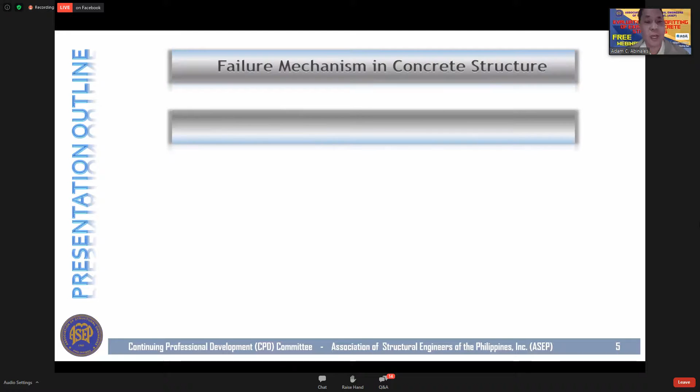Let me present to you the outline of my presentation for this afternoon. I have here to discuss failure mechanism in concrete structures, although some of these were already discussed by Doc Mac Mendoza in the first topic. Then, of course, some damages in concrete structures with infill walls. Then I would be presenting retrofitting as a strategy - what and why. Then what retrofitting techniques we can employ if we are going to do retrofitting of existing structures, and what references, codes, and guidelines we can use as reference in the retrofitting design.

So let me talk about the failure mechanism in concrete structures. First, we have failures at the member level. In the Philippines, most of our concrete structures, or rather most of the buildings here, are made of reinforced concrete, so in essence we can call most of these structures concrete moment frames. So you will have a lot of possible flexural failure in columns. You can see in this photo that the corner column is severely damaged - I would say this is almost not reusable in terms of resisting the force. And then some other aspects of the flexural failure in column.

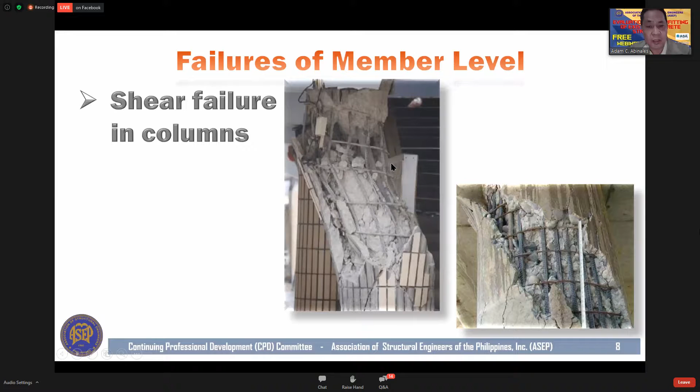Now we have these short column and long column effects. When we say short column, this is a failure of column due to the crushing of concrete. In some cases this scenario would be very prevalent - when you have openings in a facade wherein you have columns and then openings, say for example windows, that portion of the column which is unsupported will be considered a short column. Or when we say long column effect, the failure here is due to the buckling of the concrete. So as evidence here, the short column effect is a very classic case of failure in most reinforced concrete frames.

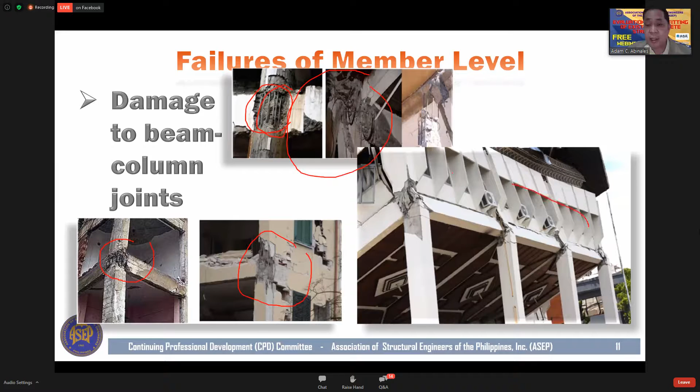Then of course you have this damage to beam column joints. As you can see here, you have exposed reinforcement, but trying to look at this joint here, it seems that the longitudinal reinforcement in that joint has no sufficient or no transverse reinforcement. Looking at this failure here at the joint, as well as this joint here, and of course this cracking of the joint, and this type of failure of the joint.

Most concrete buildings in the Philippines are provided with masonry infill walls. Most Filipinos would like their structures or buildings to be made of reinforced concrete, with solid claddings covering the building. In some cases, we use concrete hollow blocks as masonry infill.

Now, trying to understand the other type of failure, of course, is when you have your structure in total collapse. This type of failure is considered a failure of the structure as a whole. So let's look at this photo here, which I'm sure you're very familiar with.

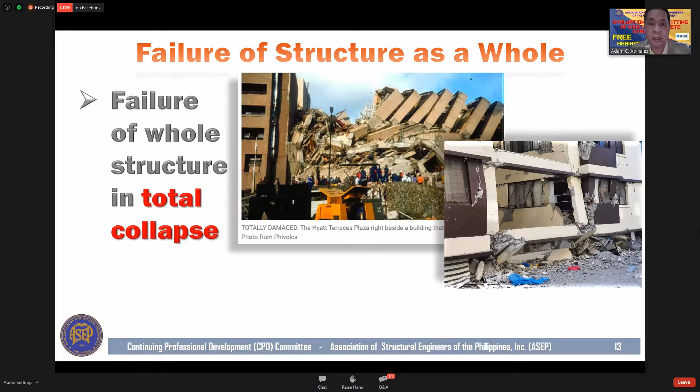This is the Hyatt Terraces Plaza in the aftermath of the July 16, 1990 earthquake that hit Baguio City and other provinces in northern Luzon. This photo here is a residential building that collapsed in the aftermath of the earthquake in Mindanao last October 2019, and this is another building in Cotabato. I think this is about a 6 or 7-story building that is considered to be in its collapse stage.

Other observed failure modes, as I mentioned a while ago, most concrete buildings here in the Philippines are cladded with infill walls. The question here is whether this infill wall would also tend to fail, considering how we model and analyze our moment frame or concrete frames. In most cases, we do not actually model the infill walls.

But depending on how these infill walls are connected to the frames, these infill walls will also fail if they are not actually designed to resist the shear force that will be transferred due to ground shaking. So most infill walls fail due to inadequate shear strength.

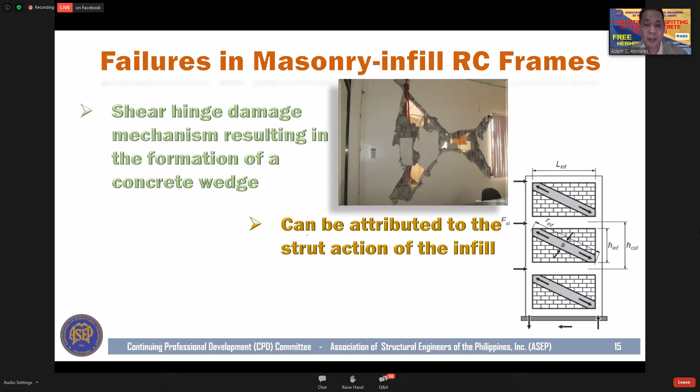So if you look at the failures in masonry infill RC frames, you could have something like a shear hinge damage mechanism resulting in the formation of a concrete wedge, which can be attributed to the strut action of the infill walls.

Looking at this frame, normally if you are really going to model your infill wall as part of your moment frame, it should be modeled as a strut. But if you do not do that, the connection of the walls to the frame will tend to receive forces from the earthquake, and then definitely these walls will fail. This is very common in almost all buildings in the Philippines.

This was before the introduction of modern seismic design provisions in the mid-70s. If we try to recall, the first national structural code published in the Philippines was in 1972.

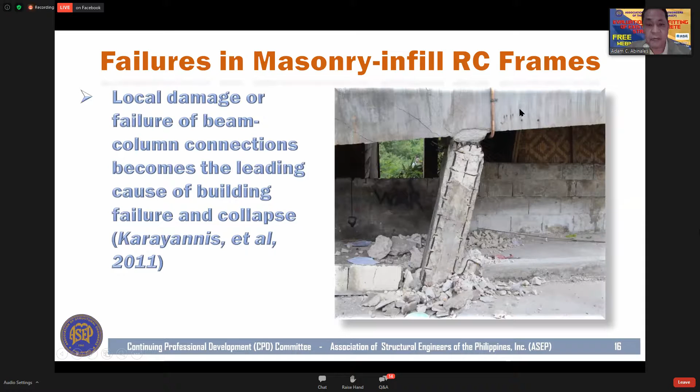Or you could have a local damage or failure of beam connections or beam-column connections, which is the leading cause of building failure and collapse. We have seen a lot of this during the Bohol earthquake, the Negros Oriental earthquake, and even the past earthquake, in simple residential dwellings, one or two story, with what they call a silong or lower ground, where these failures are very prevalent.

Now this is another photo, taken on one of the collapsed, or rather damaged, buildings in the Negros Oriental earthquake, wherein, as you can see, the column is already detached from the superstructure or from the structure itself.

So structures with an open bottom story have significant concentration of drift, and the structural damage becomes considerable. This type of frame, RC frames with infill walls, is regarded as an earthquake risk, not only in the Philippines but also in other countries like New Zealand.

Let me talk about a case of failure of masonry infill RC frame. Looking at this photo here on the right, you have a residential building structure which failed at the ground floor masonry infill and columns. Even if the building is composed of these infill walls and columns, the structure nevertheless still failed.

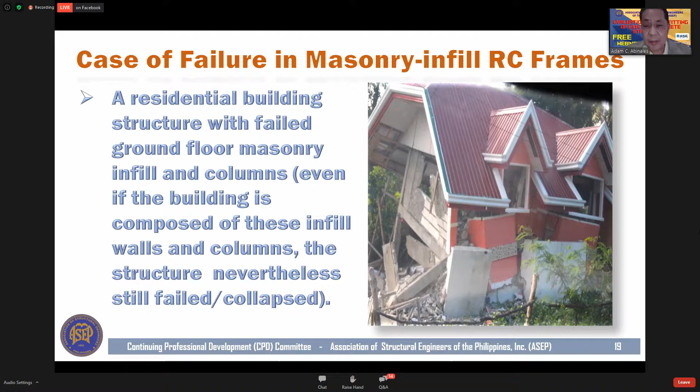So maybe for reasons that the materials used are substandard, or this building was constructed without the benefit of a professional design, or basically it was just built without the proper documents that it should be standing as such, or maybe you have a case of a masonry infill apparently that got disconnected from the concrete frame.

Well, I think this is one thing that most engineers or most constructors should look into, because the infill walls are not properly connected, but providing a space not to make the walls too rigid or too stiff, so that it will not affect the behavior of the concrete frame. Inadequate connection between the infill and the concrete frame. Or there is a case of what we call a weak beam column joint, which is very apparent.

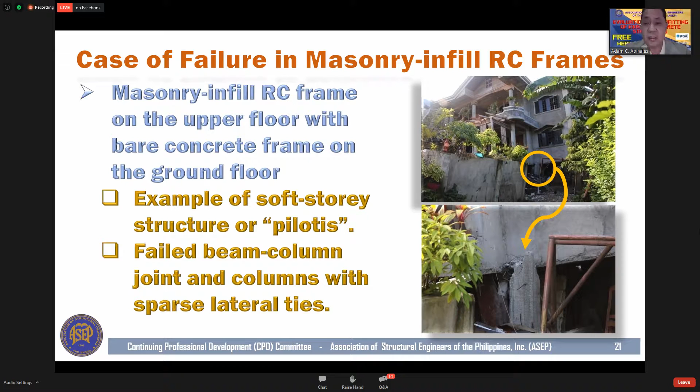Or you can have a case of a masonry infill RC frame, very massive on the upper floor with bare concrete frame on the ground floor. So this is something like a case of a soft story. Or you can have a case of a damaged two-story. This one is actually a barangay hall in the Negros Oriental earthquake with masonry infill concrete frame.

So looking at this, the connection of this floor here to this column here at that particular joint, there is inadequate connection between the masonry and the beams. Actually, there are supposed to be some walls here, but I think they have been torn down. And the beams and columns and the joints of this column to that frame there have sparsely spaced lateral ties, as you can see here at the beam column joints.

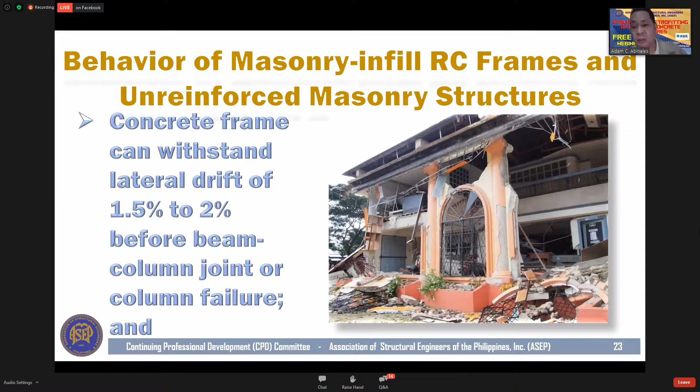If we try to understand the behavior of masonry infill RC frames and that of the unreinforced masonry, as a rule of thumb, the concrete frame should be able to withstand a lateral drift of about 1.5 to 2% before beam column joint or column failure, while the maximum stress of the unreinforced masonry is reached at a drift angle of approximately 0.3% only. So the unreinforced masonry may be expected to fail before the concrete frame does.

Reality check: similar methods of building construction made of RC frames with concrete hollow blocks as masonry infill are very common in the Philippines. We may ask, can these damaged structures be restored? The quick answer could be yes. Now we talk about retrofitting as a strategy. If our answer in the previous slide is yes, then we can still restore the building.

Of course, retrofitting or restoration of a damaged building would be subjected to a very thorough, detailed evaluation before you decide that retrofitting would be your strategy. I have seen a lot of questions in the previous presentation asking about retrofitting, so I hope I will be able to answer some of these questions. Now, why do we need to retrofit? And what is retrofitting all about?

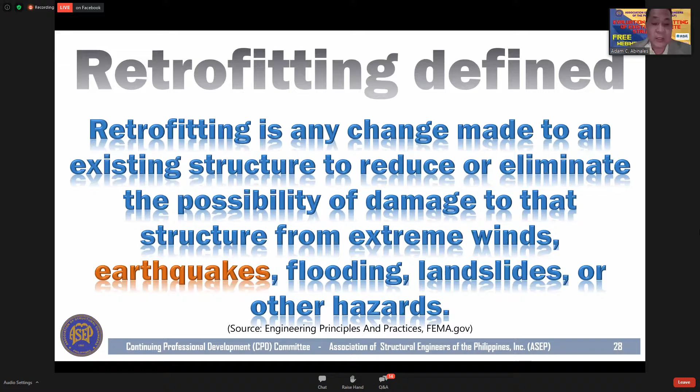What are the advantages of retrofitting? All structural problems have more than one technical solution. So in retrofitting, the engineer would have a lot of choices. But of course, the strategy would depend on how we go about the design and satisfy other retrofitting requirements. And final selection will ultimately rest upon an economic evaluation of the alternatives.

If you're doing a detailed evaluation of an existing structure and eventually a retrofitting, this is one important aspect you have to consider, the economic evaluation of the alternatives. There seems to be an industry practice or standard that if the cost of retrofitting would be about 60% of the cost of new construction, then you may decide not to push retrofitting anymore, but rather demolish the entire building and put up a new one. But of course, it will all depend on how you really evaluate your design.

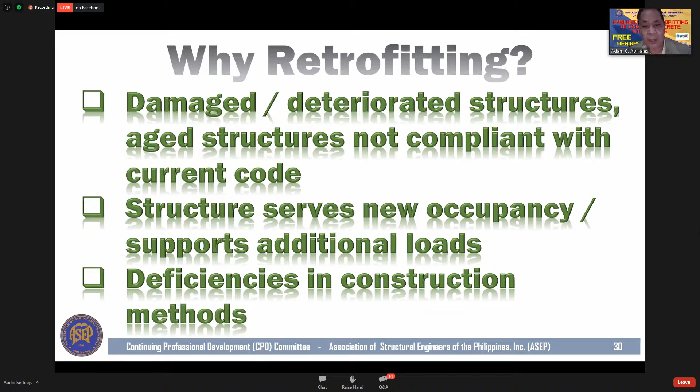Or your structure has some known deficiencies during the construction. I would like to note that this really happens, because we have some projects wherein we see newly constructed buildings which have deficiencies while these buildings are being constructed. So obviously, you will have to do some retrofitting.

Or you will have some design deficiency. This may happen when the building is already constructed, and then during the early serviceability of that building, there are some manifestations of cracks or distress. Then there would be a cloud of doubt of having a design deficiency for that particular building. So in that case, you will have to do a detailed evaluation.

In your evaluation, you might find out that compared to the actual strength, you have a deficiency, or in the actual serviceability, you have an issue, or you have not met the performance level objective. As we all know, in the NSCP 2015 or the previous NSCP code editions, life safety is the minimum code requirement set as the performance level objective. Let me just present to you this video.

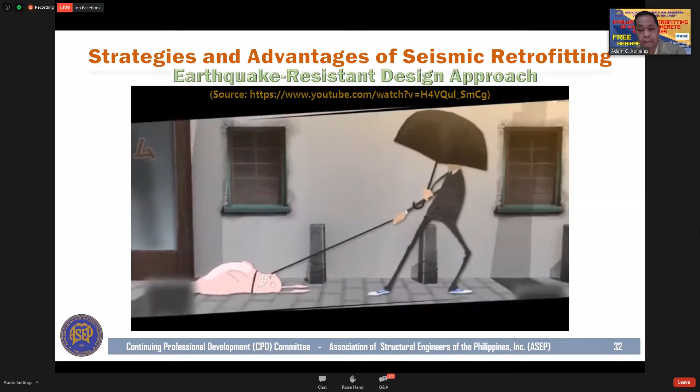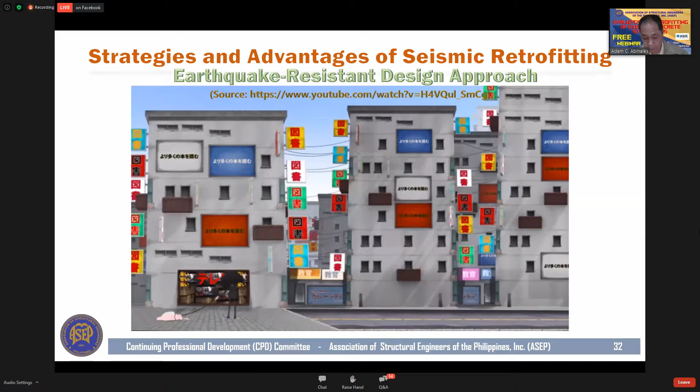Earthquakes have always been a terrifying phenomenon, and they've become more deadly as our cities have grown, with collapsing buildings posing one of the largest risks. Why do buildings collapse in an earthquake, and how can it be prevented? If you've watched a lot of disaster films, you might have the idea that building collapse is caused directly by the ground beneath them shaking violently, or even splitting apart. But that's not really how it works. For one thing, most buildings are not located right on a fault line, and the shifting tectonic plates go much deeper than building foundations. So what's actually going on?

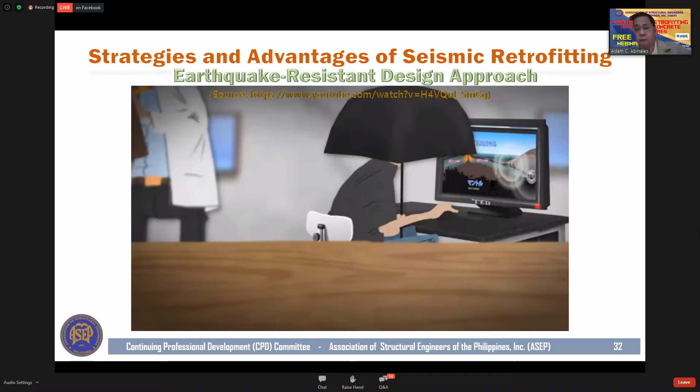In fact, the reality of earthquakes and their effect on buildings is a bit more complicated. To make sense of it, architects and engineers use models, like a two-dimensional array of lines representing columns and beams, or a single line lollipop with circles representing the building's mass. Even when simplified to this degree, these models can be quite useful, as predicting a building's response to an earthquake is primarily a matter of physics. Most collapses that occur during earthquakes aren't actually caused by the earthquake itself.

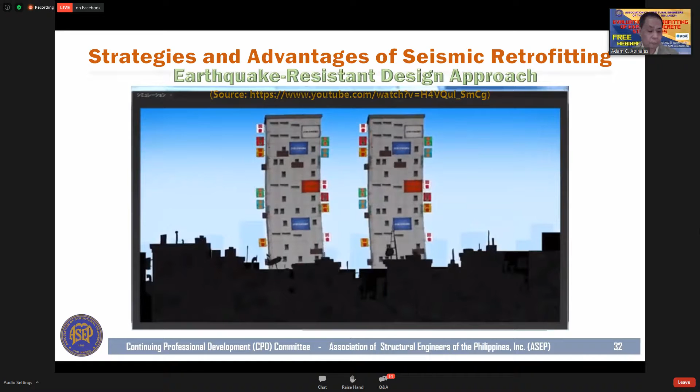Instead, when the ground moves beneath a building, it displaces the foundation and lower levels, sending shock waves through the rest of the structure and causing it to vibrate back and forth. The strength of this oscillation depends on two main factors: the building's mass, which is concentrated at the bottom, and its stiffness, which is the force required to cause a certain amount of displacement. Along with the building's material type and the shape of its columns, stiffness is largely a matter of height. Shorter buildings tend to be stiffer and shift less, while taller buildings are more flexible.

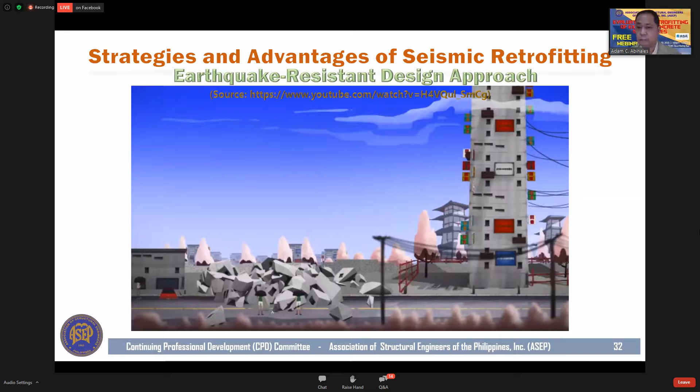You might think that the solution is to build shorter buildings so that they shift as little as possible. But the 1985 Mexico City earthquake is a good example of why that's not the case. During the quake, many buildings between 6 and 15 stories tall collapsed. What's strange is that while shorter buildings nearby did keep standing, buildings taller than 15 stories were also less damaged. And the mid-sized buildings that collapsed were observed shaking far more violently than the earthquake itself. How is that possible? The answer has to do with something known as natural frequency.

In an oscillating system, a frequency is how many back and forth movement cycles occur within a second. This is the inverse of the period, which is how many seconds it takes to complete one cycle. And a building's natural frequency, determined by its mass and stiffness, is the frequency that its vibrations will tend to cluster around. Increasing a building's mass slows down the rate at which it naturally vibrates, while increasing stiffness makes it vibrate faster. So in the equation representing their relationship, stiffness and natural frequency are proportional to one another, while mass and natural frequency are inversely proportional.

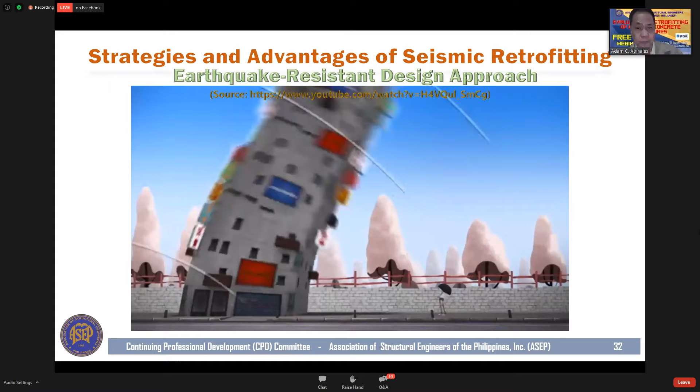What happened in Mexico City was an effect called resonance, where the frequency of the earthquake's seismic waves happened to match the natural frequency of the mid-sized buildings. Like a well-timed push on a swing set, each additional seismic wave amplified the building's vibration in its current direction, causing it to swing even further back, and so on, eventually reaching a far greater extent than the initial displacement.

Today, engineers work with geologists and seismologists to predict the frequency of earthquake motions at building sites in order to prevent resonance-induced collapses, taking into account factors such as soil type and fault type, as well as data from previous quakes. Low frequencies of motion will cause more damage to taller and more flexible buildings, while high frequencies of motion pose more threat to structures that are shorter and stiffer.

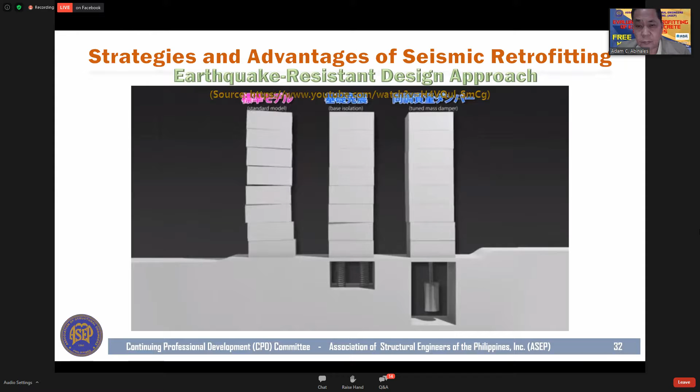Engineers have also devised ways to absorb shocks and limit deformation using innovative systems. Base isolation uses flexible layers to isolate the foundation's displacement from the rest of the building, while tuned mass damper systems cancel out resonance by oscillating out of phase with the natural frequency to reduce vibrations. In the end, it's not the sturdiest buildings that will remain standing, but the smartest ones.

Okay, so basically, when we talk about retrofitting, and by the way, I would like to acknowledge Dr. Andy Oreta for that video, because I took that video from one of his presentations.

Okay, so basically, when we talk about retrofitting, we are focusing more on the structure to be earthquake resistant. So if you have a building, and then we subject it to the usual gravity loads, and then we analyze it for lateral forces like wind, and of course the excitation of the ground. Now the building itself would be able to dissipate that ground motion; that seismic energy from the earthquake would be dissipated by the structure itself.

As we all know, the building itself has its damping characteristic, and there's a certain percentage of that building to be able to dissipate the energy from the ground motion or ground shaking. So that's why when we design the building or the structural members of the building, we have to satisfy strength and of course ductility. Definitely, when we talk about ductility, we see to it that we satisfy the requirement of the code as far as seismic detailing is concerned.

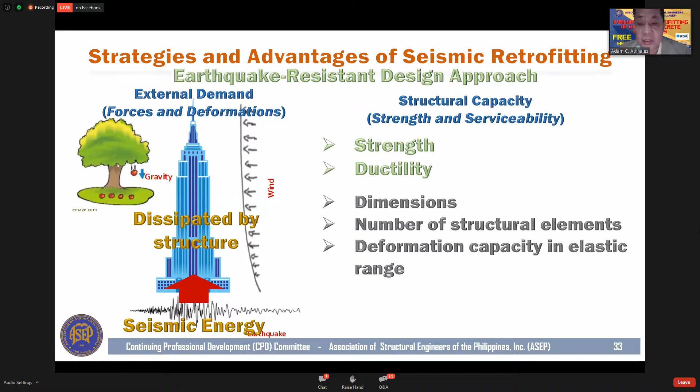And then in our design of the structure, we deal with these other properties of the structure. We look at the dimensions of the floor to floor, the dimensions of the base, and the number of structural elements to be used, the columns, the shear walls, and so on. And then we must design it so that we satisfy the requirement for the deformation within the elastic range. And then, of course, as we push the structure further, we must satisfy the deformation capacity in the plastic range. That is where the ductility will come in.

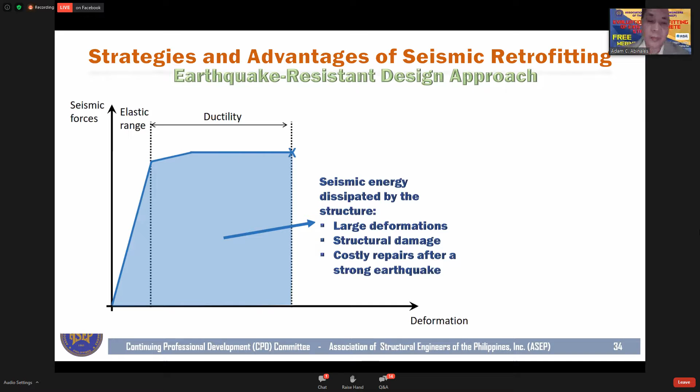When we talk about earthquake resistant design, we expect that the building or structure would still be able to sustain some damage, but not to the point that the damage would be irreparable. Because otherwise, if that building were subjected to a strong earthquake, you might end up doing a costly repair.

So this graph here tries to define the performance level objective. For our structure to be able to sustain large deformation and satisfy the life safety requirement, we can go beyond this point. But definitely it really depends on the earthquake motion that would be subjected to your structure.

Now, when we do retrofitting, what are the strategies, or actually the advantages? Basically, it completes the load path. In some cases, when you find issues about the load path or load pattern of the lateral force resisting elements, you will be able to eliminate or reduce the potential structural irregularity.

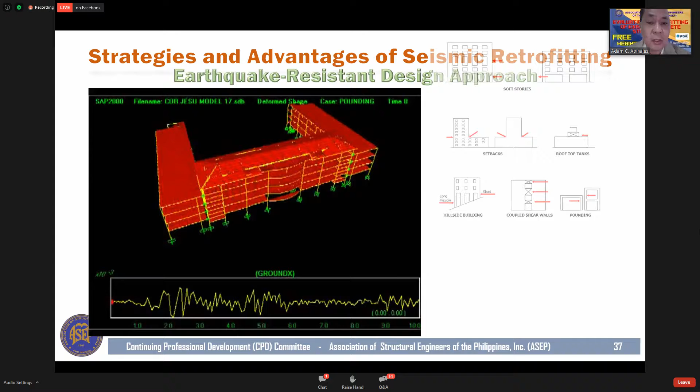Now let me show you this video. This is a case showing one of the irregularities that needs to be looked into. You have a case of pounding because of a U-shaped building, which is very common in public school buildings here in the Philippines using a U-plan. If you have this case, it's better to have a seismic gap at this joint.

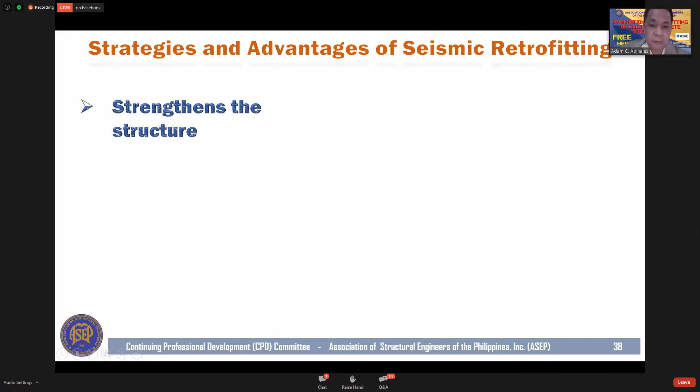Basically, retrofitting will strengthen the structure. There's no doubt about it; that is the main objective of retrofitting, whether you do localized member retrofit or global retrofitting. In that case, you reduce the earthquake demand and try to compare the demand versus the capacity of the structural elements.

Or if you have some structure with a damping device or system, then you would be able to reduce the seismic demand.

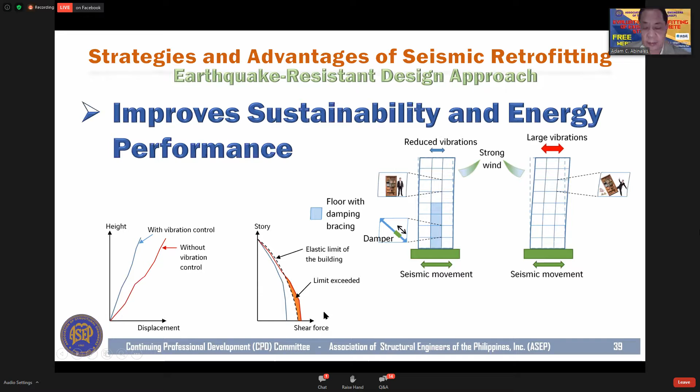Retrofitting an existing building can oftentimes be more cost-effective than building a new facility, since buildings consume a significant amount of energy. If you try to look at sustainability in building construction, 40% of the nation's total energy consumption is utilized for building construction and occupancy, and especially for heating and cooling, that's almost 32%.

Nowadays we have been talking about green buildings, and as a structural engineer we also have our role in how we make our building compliant as a green building certified. Because existing buildings comprise the largest segment of the built environment, it is important to initiate energy conservation retrofits to reduce energy consumption and the cost of heating, cooling, and lighting buildings.

But conserving energy is not the only reason for retrofitting existing buildings. You have to consider the main aspect: why do we do retrofitting? And that depends on the outcome of your detailed evaluation.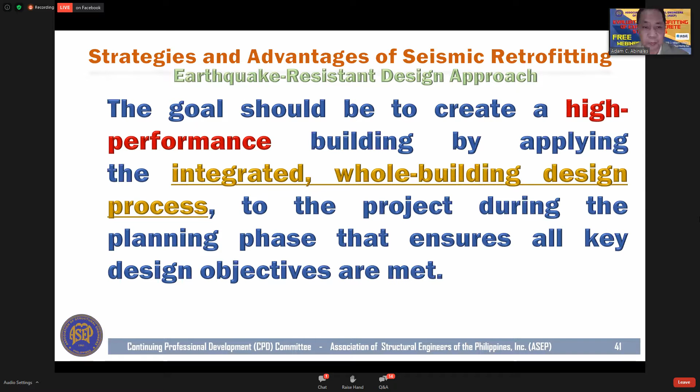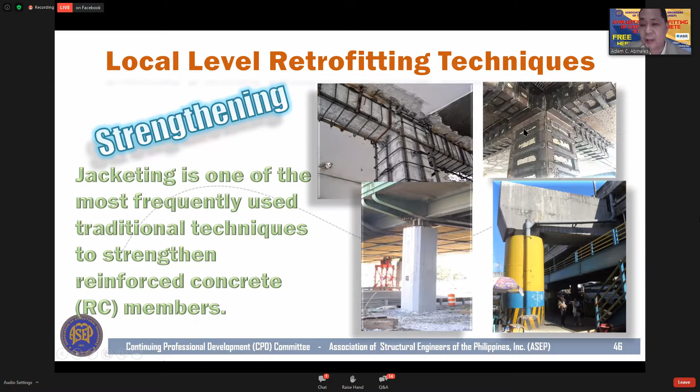So let me focus on each of these techniques. Strengthening via jacketing is one of the most frequently used traditional techniques to strengthen RC members. You have a case in this photo here, strengthening this frame, or that frame, or this column here.

Strengthening of an RC column is needed when the load carried by the column is increased, maybe due to an increase in the number of floors or design deficiency. The compressive strength of the concrete or the percent and types of reinforcement are not according to the code.

You might ask, does this really happen? Yes, because in my personal professional practice, we do some review of designs from other engineers of record, and sadly, we find cases wherein the designer has this kind of issue.

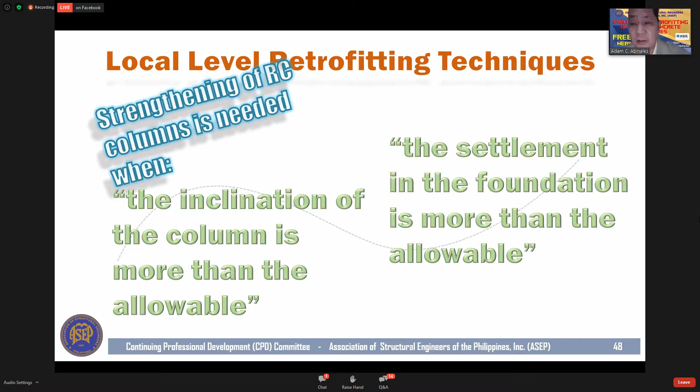Or the inclination of the column is more than the allowable. As we all know, the column should be laid vertical, it should be vertically aligned. But if there is some displacement or deformation of the structure, then there is a tendency for the column to be out of plumb. Like in the case of the Tower of Pisa, although that is very classic, even if it is inclined, it remained as it is. Or there is a settlement in the foundation which is more than the allowable.

What are the major techniques of strengthening? We have the traditional techniques: concrete jacketing and steel jacketing, or simply using externally bonded steel plates. The alternative would be post-tensioning, or fiber-reinforced polymer wrapping, which we call FRP wrap.

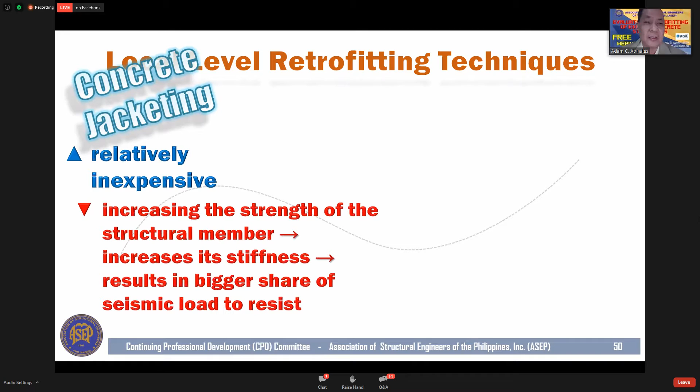Concrete jacketing. I would say concrete jacketing is relatively inexpensive. But when increasing the strength of the structural member using jacketing, you increase the stiffness, but you also increase the seismic weight. That is the downside. Even if the original column is 30 by 30 and you make it 60 by 60 just to satisfy the demand, you're definitely adding seismic weight. So that is the drawback.

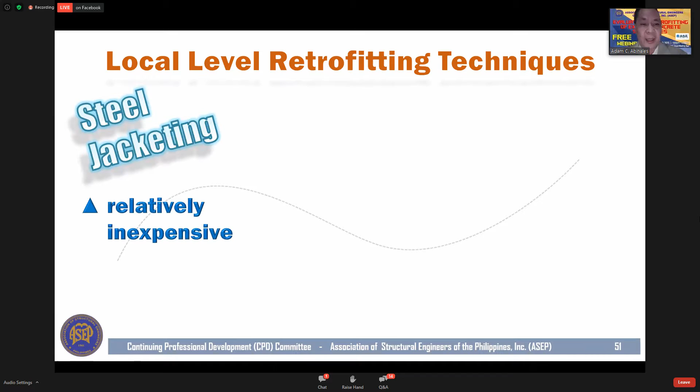For steel jacketing, same as in the case of concrete, it is inexpensive. However, there would be a substantial increase in the weight because of the weight of the steel added to the element.

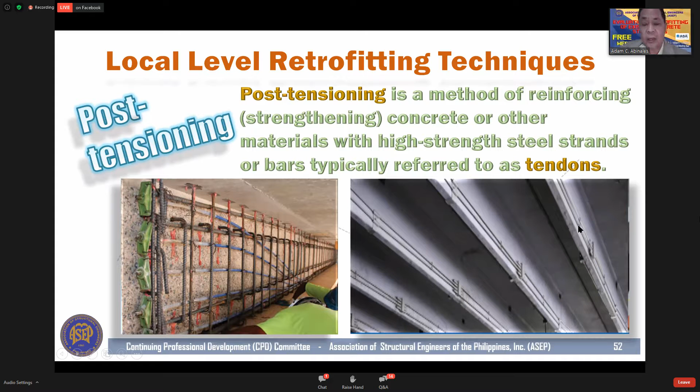The alternative is to do post-tensioning. Post-tensioning is a method of reinforcing or strengthening concrete or other materials with high-strength steel strands or bars, typically known as tendons. As you can see in this photo, these are the tendons placed outside the face of the girder, similar to this photo on the right in the building, where you have a series of beams which are all retrofitted or strengthened using post-tension wires or tendons.

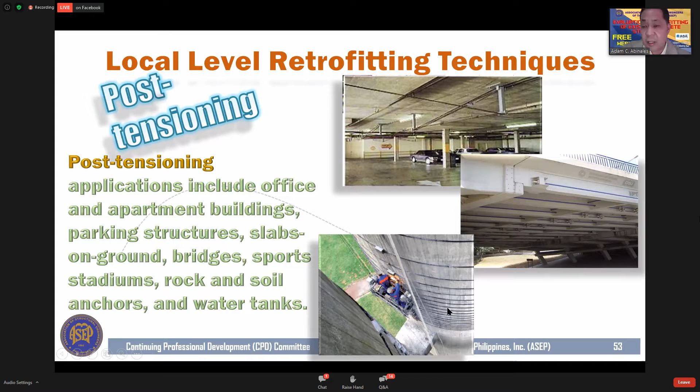In many cases, post-tensioning allows construction that would otherwise be impossible due to site constraints or architectural requirements. But of course, if the ceiling is exposed, then you can see the structural elements, and definitely you can do the post-tensioning there. But if you have a closed ceiling building, that would be a big issue architecturally. Still, you can do the post-tensioning strengthening, but you will be doing a lot of retrofitting work. Now, what you see here is post-tensioning applied to water tanks.

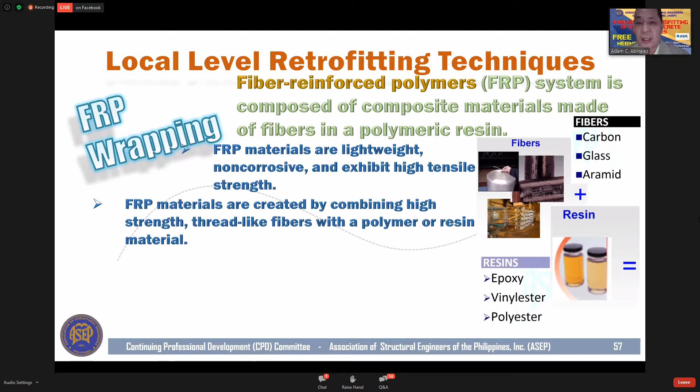Now, FRP wrapping. FRP, as we all know, is a system composed of composite materials made of fibers and polymeric resin. For fibers, you can have carbon, glass, or aramid. For the resin, the polymeric resin can be epoxy, vinyl ester, or polyester. With this composite material, you create the FRP by combining high-strength thread-like fibers with the polymer or resin material, resulting in a rigid material that is high-strength yet lightweight. The fibers give the material its strength and stiffness characteristics, while the polymer holds the fibers in alignment.

Now, what you can see here are illustrations of some structures that were fiber wrapped. Say, for example, you have these piers of a bridge, wherein you have a series of columns, and then they apply this retrofitting, or rather this strengthening, using FRP, and now this is the finished job.

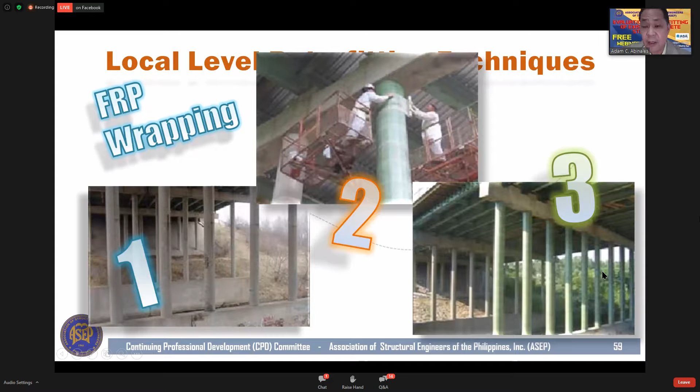Another case wherein you have these slender columns, so trying to increase its flexural and shear capacities, then you have this wrapping, and now this is the completed retrofitting work. Also here, applying the FRP, and now you have the finished retrofitting work using FRP.

In buildings, say you have a slab, and then you try to do some retrofitting of this particular section of the slab, or maybe in the case wherein there is an increased live load in this area, you can apply retrofitting here. Or maybe this could be along the line of the beam. It really depends. Actually, we have a case wherein we have a multi-purpose court, wherein we have to do retrofitting of the slab because underneath the multi-purpose court there is a cistern.

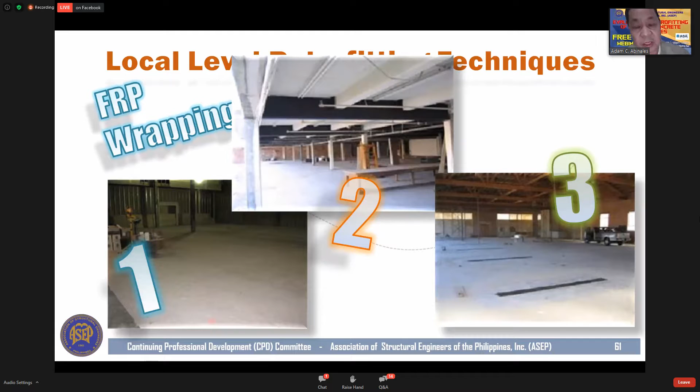Or in pipes, you can also do this retrofitting inside the pipes.

So that is all about those traditional and alternative techniques applied to strengthening of the beams, strengthening of the columns, strengthening of the joints, and then you apply these techniques. Now, what about strengthening the footings?

Well, basically, you can do it either with concrete or steel jacketing. You can still do it using FRP wrapping, or there are cases wherein you have to intervene, especially under the foundation, and that is doing the underpinning. Or you can do the combination of both jacketing or wrapping and underpinning.

Now let me show you some of the photos for strengthening of the footings. So this is a procedure wherein you can do the strengthening of the footings. On slide one, you have this exposed column, and then of course the footing. Just imagine that portion here, which is only the footing of that column, and then you lay down your reinforcement, put all the rebars, the cage, and then pour the concrete.

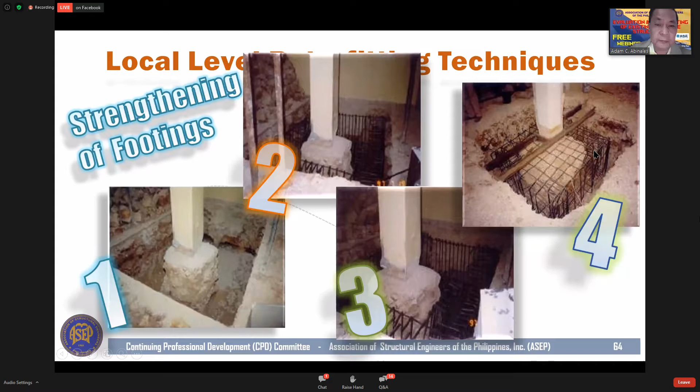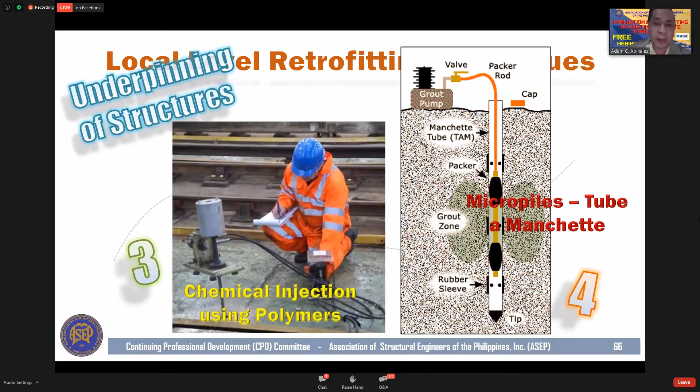Or you do chemical injection using polymers. Or in number 4, you can do micropiling or micropiles, the use of micropiles. And then in number 5, you do some soil or in-situ stabilization. This is what we know as ground improvement, wherein you want to increase the bearing capacity of the underlying soil.

So sometimes you can do it. Of course, if you have an existing building, then you can only do it either by jet grouting or soil cement column.

Now, what about strengthening of masonry infill or shear walls? Basically, you just do some use of spray-on materials such as engineered cementitious composites. So the process would be something like this: you have to expose the reinforcement because if you have a crack, you try to get the influence area of this crack or damaged portion of the wall, then you expose and clean everything.

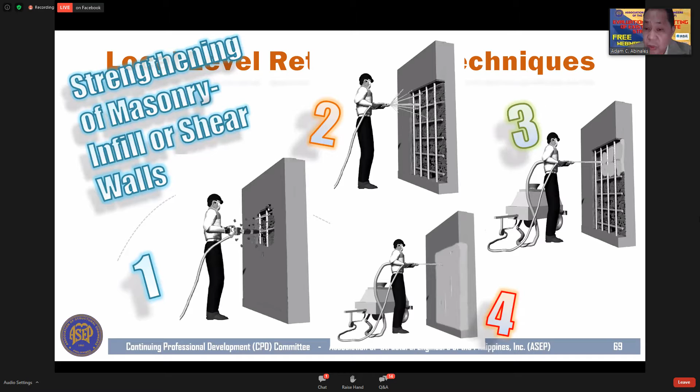Then you do the application of the cementitious material, either by pressurized spray, a pressure jet of concreting, or spray concrete, to restore the damaged portion of the wall.

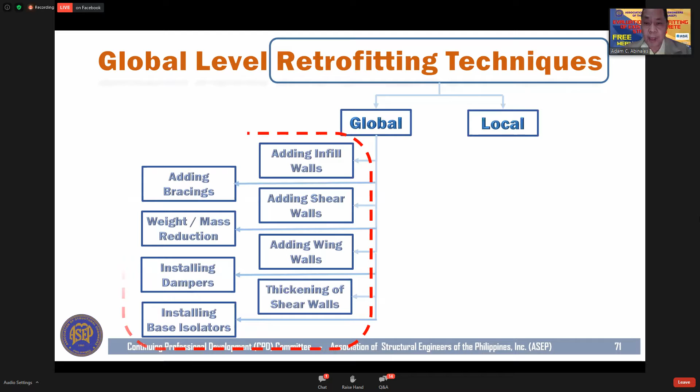Now, let's go to the global retrofitting schemes. This global retrofitting tends to alter the behavior of the entire structure, so whatever technique is used, that would be the effect. This happens because there is a change in the load path. As I mentioned earlier, system strengthening will definitely change the load path, and it will reduce the seismic effects on the structure.

The objectives of global level retrofitting is to increase seismic resistance, resulting in reducing seismic demand. Now let me go through each of these global level retrofit techniques one by one.

Adding infill walls: the share of the seismic load is taken by the infill from the concrete frame. If the infill wall is so connected to the frame that it will affect the behavior of the frame, then make sure you have a very strong, good connection, because the infill must be strong enough to absorb the seismic load.

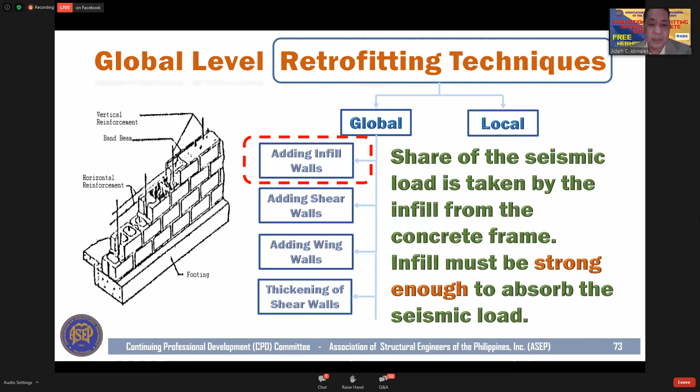This is actually a three-story building which I photographed in Taiwan when we visited after the Tainan earthquake. This base of the building was converted into a shear wall, and this building performed well during the Tainan earthquake, because at that time the building was already there. I would say this building was damaged in a previous earthquake before.

Adding wing walls: this is very common in institutional structures like churches, where you have these wing walls added to the frame. These wing walls will take the share of the seismic load in the direction where they are added.

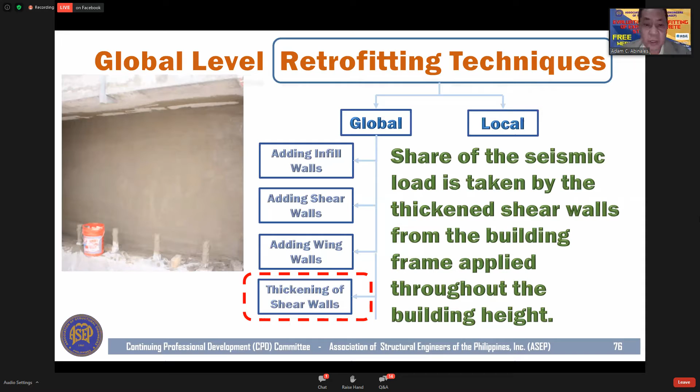Now let me go to adding bracings. The share of the seismic load is taken by the bracings. What is the effect? It will reduce the drift demand, and can be placed either interior or exterior of the system. These bracings could be post-tensioned, especially if you are using tubular sections for the bracing, with post-tensioning introduced inside those tubular sections.

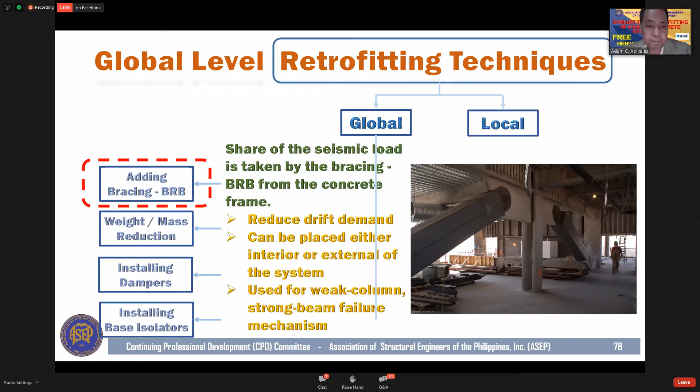Weight or mass reduction: basically this applies to a case where you have a very top-heavy or heavy upper floor, to reduce seismic demand. Sometimes buildings have a storage area in the upper floors that you have to move to the lower floor or to the ground floor, assuming there is no basement.

Now let me proceed to the introduction of passive systems or isolation, something like controlling the vibration of the building, or decoupling the superstructure from the substructure. So either you use dampers or you use base isolators. Typically when we talk about dampers, it is more accurately vibration control devices. Let me give you the difference: when do you use vibration control devices, and when do you use base isolators?

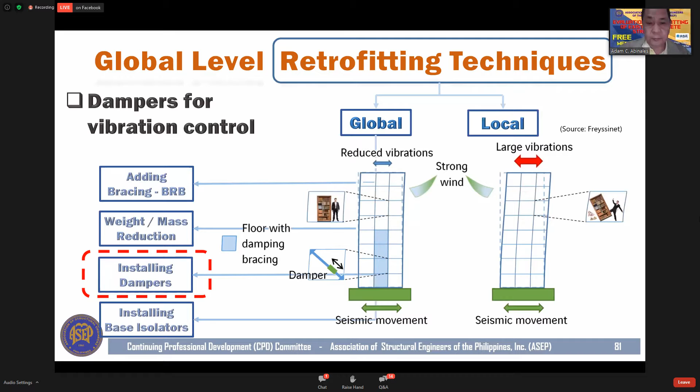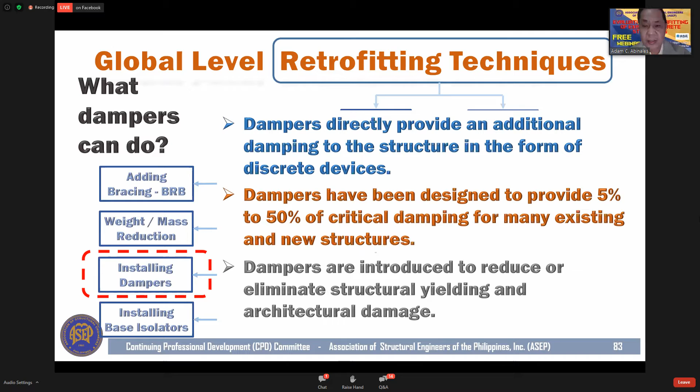What can dampers do? Dampers directly provide additional damping to the structure in the form of discrete devices. Dampers have been designed to provide 5% to 50% of critical damping for many structures or even new structures. Dampers are introduced to reduce or eliminate structural yielding and architectural damage.

What are the advantages of dampers then? Again, let me go back to the figure presented a while ago. So you have this building, and then you have these loadings, the wind and the ground shaking, and then you have the seismic energy which is being transferred to the structure. Because of the inherent damping characteristic of the building, based on the proportion of the elements, the energy would be dissipated by the structure to a certain amount.

But if you introduce dampers, then the other seismic energy would be further dissipated by the dampers. So dampers reduce energy transmitted to the structural members, and reduce the amplitude and period of the vibration. Then in effect, the forces and demand would be reduced.

So what happens if the building has dampers? Going back to the graph before, you have the force and displacement curve, wherein you design your building within the code, within the elastic range, and you know for a fact that you still have the ductility of the elements. It can further absorb the deformation.

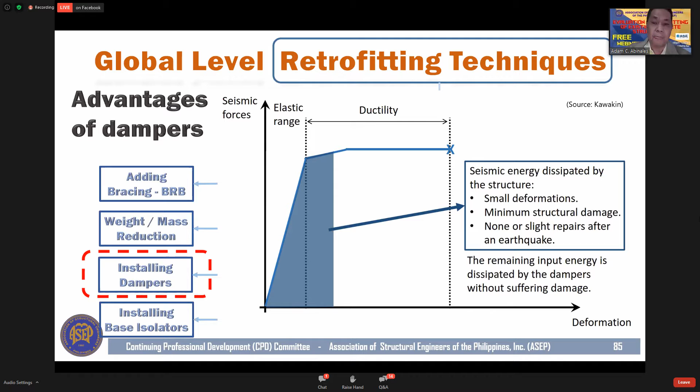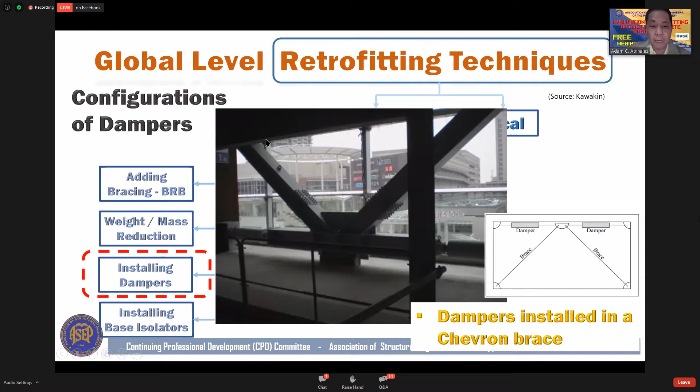So let me show you some configurations of dampers. This is dampers installed as diagonal braces, or dampers installed as a chevron brace, something like this, wherein these are the dampers, or dampers installed in a toggle brace.

It could be an outer frame, meaning you can put the dampers on the external facade of the building, although it would have an architectural aesthetic effect, because practically you're covering the structure with these devices. Or it could be dampers in a toggle brace inside the building, or a built-in frame.

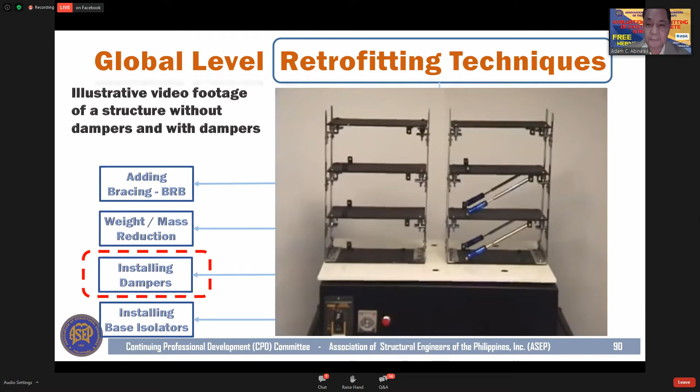Now, let me talk about isolators. I'm almost on the last part of my presentation. The principle of base isolation is that the structure is designed to remain elastic under reduced actions. The deformations are concentrated only in the seismic devices, referring to the base isolators. What are the advantages? Base isolators, again, reduce seismic demand. Base isolators raise both a structure's seismic performance and its seismic sustainability considerably.

Base isolators lower inertial forces in the structure. They limit interstory drift, thus causing almost no damage to non-structural elements. Base isolators reduce perception of shaking.

You know, if you are inside a building which has base isolators... actually I have heard a personal experience of a friend who is staying in a building which is base isolated. Everyone felt the earthquake, but those people in that building with base isolators didn't feel the ground shaking, because that is the perception. Base isolators promote immediate occupancy of the structure after the event.

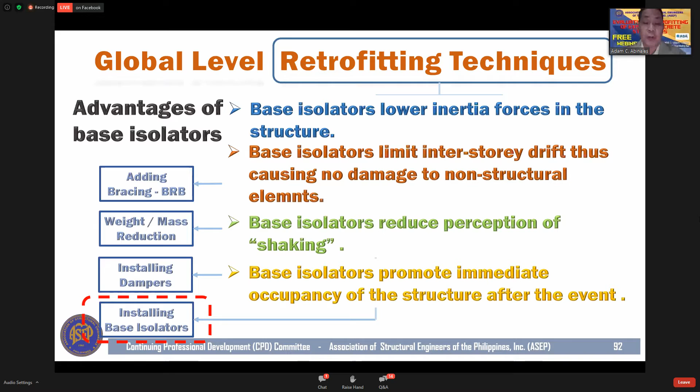If there are advantages, then there are disadvantages. Base isolators can be an expensive solution. Contrary to popular belief, base isolation does not make a building earthquake-proof. Well, this is a debatable, I would say, statement or phrase about earthquake-proof structure. Whenever I have been talking about seismic retrofitting, I only use the term earthquake resistant, and I do not use the term earthquake proof.

So base isolators, if you use them as retrofitting, you might think, how can you retrofit a building using base isolators if it's already existing? Because in almost all cases, you use base isolators when you are starting a new building. But basically we can do base isolation for an existing building. Say for example, you have a column to be cut. Definitely you have to cut the column. And then you place the support and the beams before you cut the column.

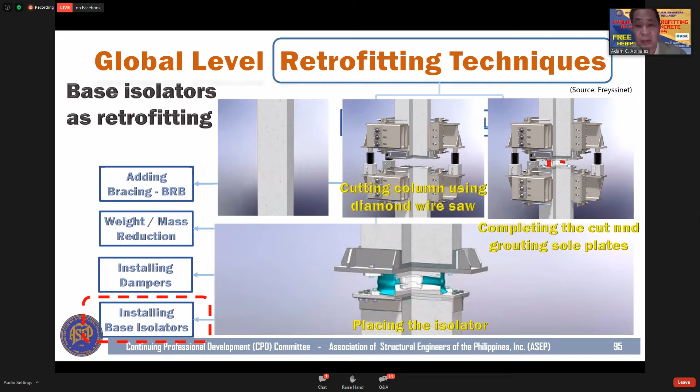So what happens then? You cut the column using a diamond wire saw. Then you complete the cutting and grout the sole plates as part of the mechanism of the jacks, and then you place the isolator. I think there is one paper during the AIC last year where a hospital in Turkey was retrofitted using base isolators.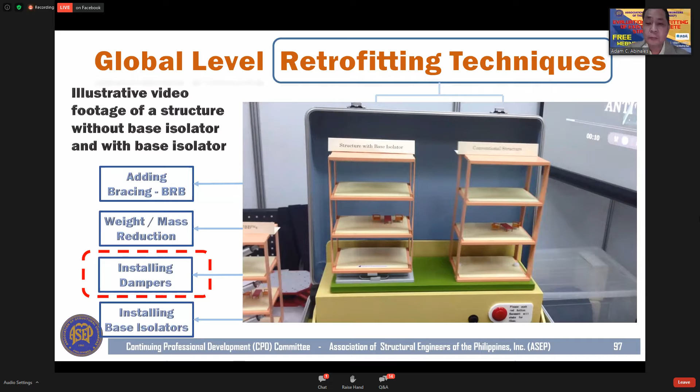Okay. So base isolators plus dampers, when you combine them as retrofitting, it is also possible, with viscous dampers acting in parallel with the isolators to increase the energy dissipation. When I visited Japan last year, sometime in October, I visited another company there, and their building is base isolated. I went to the basement of that building and I saw the combination of these base isolators with dampers. So you could just imagine. Maybe they are showcasing that building with these base isolators and dampers.

Okay, so let me now refer you to the codes and standards. One of the questions raised before is that there's no code or standard about retrofitting in the NSCP. Yes, you are right, there's no such thing. But let me just walk you through. In designing and choosing retrofitting techniques, before you go into the design, first you have an efficient and integrated load path. Make sure that you will be able to really analyze your structure and identify this.

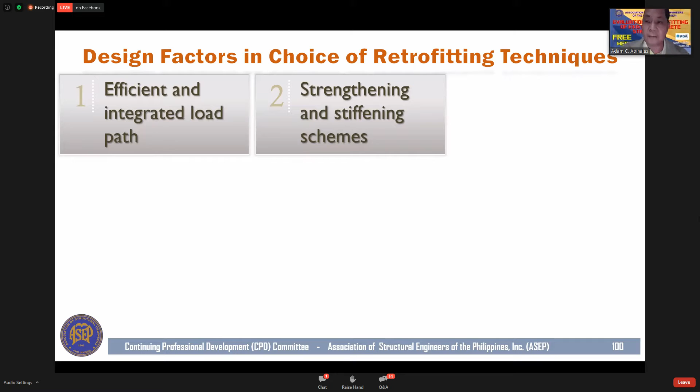Then you think about the strengthening and stiffening schemes. You don't think of one technique or two techniques. You have to think of all possible strengthening techniques. In fact, when we did a project for one government agency, we had to prepare 3 schemes, and that is the minimum requirement of that agency. Then when you do the analysis, you identify all the possible failure modes. All of these things you will be able to find out in your evaluation as presented by Doc Mac.

Then you look at increasing the deformation capacity of the members, because that is your goal in retrofitting, and reducing the force demands in the members. So basically, these are the factors that you have to think of. And then, obviously, you must also consider the aesthetics.

Appearance of the structure. But if there are cases wherein you cannot really avoid putting all these retrofitting devices, then so be it, the aesthetic would be compromised. Make sure that it can be easily constructed, or it is workable, or maybe is the technology available, locally available.

But of course, in the Philippines, although we don't have some big factories or shops here wherein other tech devices are available, we have neighboring countries in the ASEAN region where we can source this technology. Of course, you have to consider the cost, and you decide on the final retrofitting scheme.

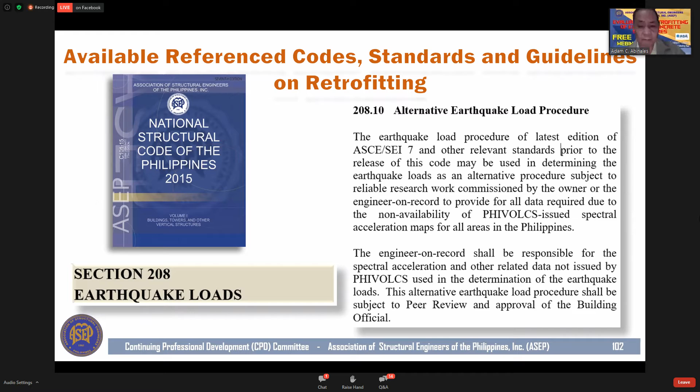Also, in Section 208, there are alternative procedures discussed: alternative lateral force procedures using rational analysis based on well-established principles of mechanics may be used in lieu of those prescribed in these provisions. And in the same section, you have 208.4.8.4.2 on seismic isolation. Seismic isolation, energy dissipation, and damping systems may be used in the design and analysis of structures when approved by the building official and when special detailing is used to provide results equivalent to those obtained by the use of conventional structural systems.

So I would say that these provisions of the NSCP would give a hand to the structural engineer. But I would say that the structural engineer must be knowledgeable enough on these aspects of alternative procedure. You really have to fully understand the principle behind this. Okay.

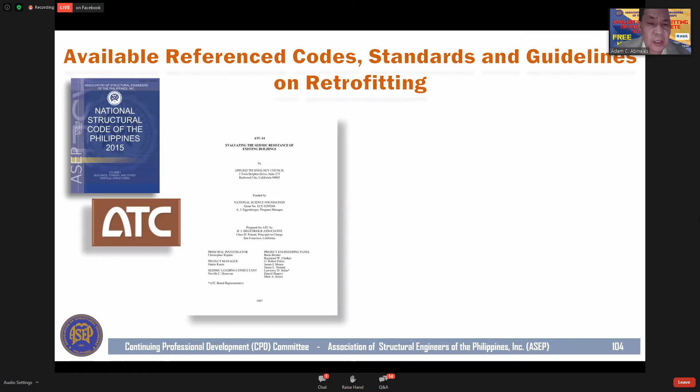We have this ATC-14, which is basically a publication that created a concept of screening buildings for potential hazard. Of course, this is covered by the evaluation as presented by Doc Mac Mendoza. But when you talk about retrofitting or rehabilitation, there is this supplemental.

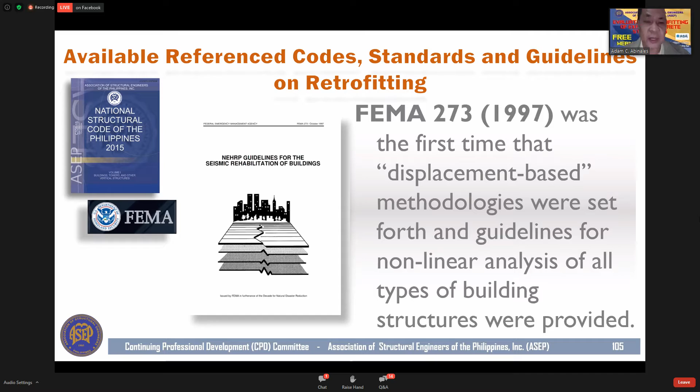Any problem? Am I clear? Okay.

So FEMA 273, wherein you have the NEHRP guidelines for the seismic rehabilitation of buildings. Then later on, we have ASCE 31-03 on seismic evaluation of existing buildings. That is supplemented with ASCE 41-06 on rehabilitation of existing buildings. Then, of course, an updated version of that is 41-13. Now the latest version is 41-17.

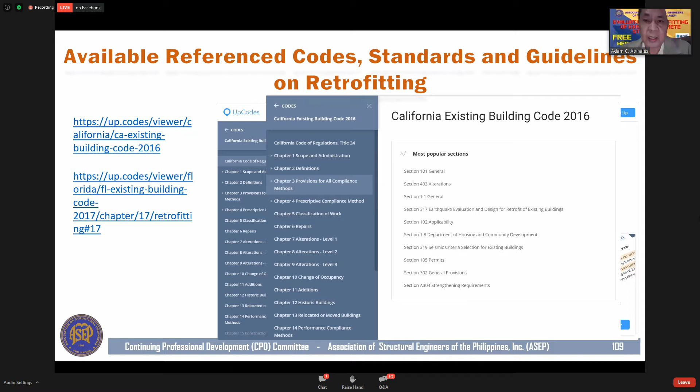So the 31-03 and the 41-06 were combined into one document, and you have this 41-13 or the latest 41-17 for the evaluation and retrofit design of buildings. Of course, Doc Mac presented the IEBC as an alternative. And you can search these website links on the California existing building code and the FEMA publications on seismic rehabilitation.

So we did first the structural investigation. We do site inspection, field measurement, and prepared the as-found—not the as-built—because this building is from the 60s or 70s, and there's no as-built available. If there is an available as-built, then you validate it. If there is none, then you have to prepare the as-found.

Then you do the testing, because you cannot do the as-found without conducting all this testing. You have to do probing of the foundation, exposing it so you'll know the size of the footing and what foundation type is used.

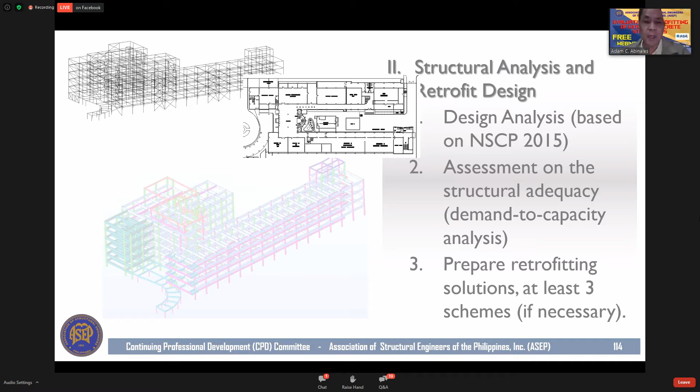And then the third scheme we presented is retaining it as a special moment resisting frame, because the existing building is supposed to be an SMRF system. Then the strengthening is on local members, doing the jacketing—a combination of concrete jacketing, steel jacketing, and fiber wrapping.

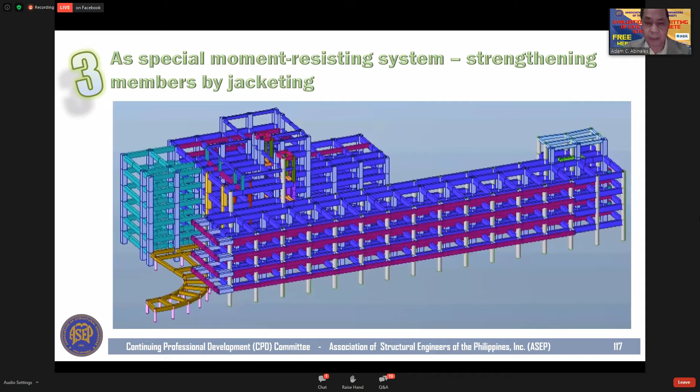And we came up with a 4th scheme. Although we are required only to do 3 schemes, when presenting them you have to show which among the 3 schemes would be advantageous to the client in terms of cost.

So I will not discuss the details further, but in this particular project, it was scheme 1 that we first recommended, since that scheme gave us the least cost among the 3—the bracing itself—rather than using scheme 2 with the shear walls, or doing the jacketing.

Now in the 4th scheme, what we did is the global retrofit using vibration control, and in this case we use dampers. Let me show you, because this is very interesting—I will show you a video because I cannot upload it directly, it's too large. So let me just show you that video.

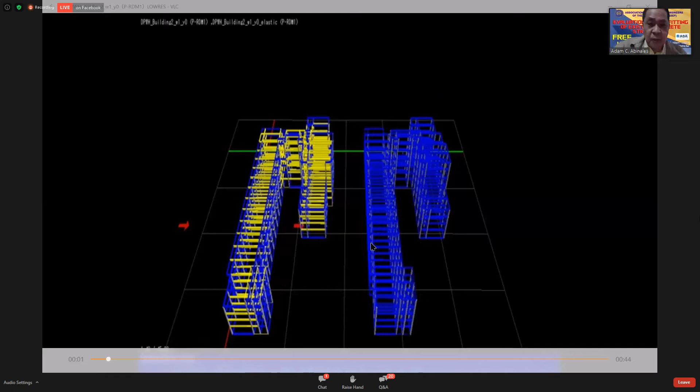So this is the video of that building. On the left side, do you see the video? I hope you see the screen. On the left side of the screen is the model of the structure without the dampers. On the right side is the model of the structure in which the dampers are already installed.

So this is subjected to a ground motion—actually 6 ground motions, 3 synthetic and 3 real earthquake events. And this is now the retrofitting scheme here, in that direction, in the transverse direction.

The shear walls were provided as wing walls in the X direction, or the transverse direction. Imagine if that building is subjected to this ground motion on the left side - it seems the building would collapse, unable to sustain that ground motion. But with the shear walls added as wing walls, the building would still be standing. Now let me show you the other video.

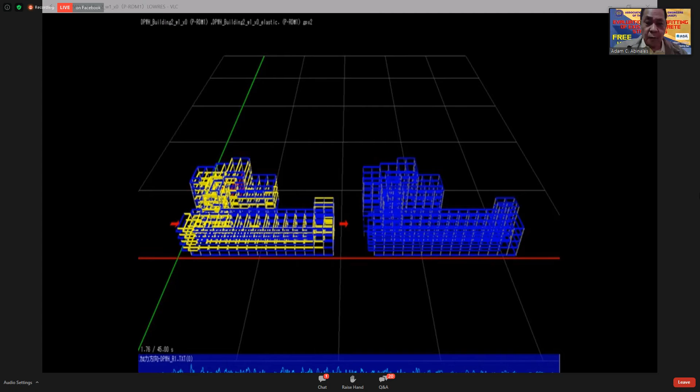This one, the earthquake is in the longitudinal direction. In the longitudinal direction, the dampers are installed, and predominantly the dampers are the ones resisting the seismic demand. So you can see the response of the building's behavior when subjected to this ground motion. As you can see, the movement or deformation of the building on the left side is very significant, to the point that in that direction it is more likely the building will not be able to sustain the ground shaking.

In conclusion, traditional member retrofitting techniques such as jacketing and post-tensioning would be economical in terms of material cost. However, other construction factors could be costly, such as labor, time, and equipment. In the case study I presented, the main issue was the disruption of operations of that building - an office building, a government building, where you cannot simply disrupt operations because it is a vital government agency building. The cost of relocating the occupants would be an additional cost compared to the first scheme.

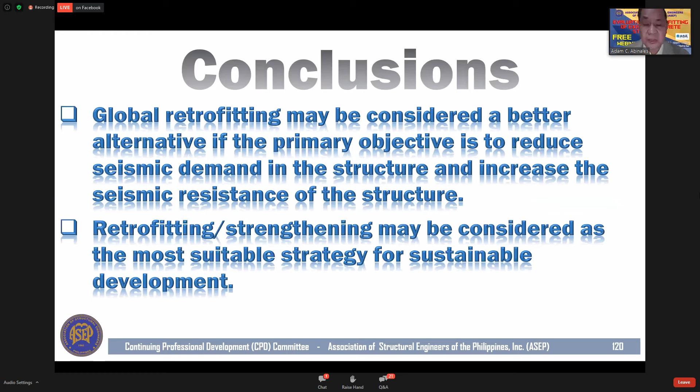Global retrofitting may be considered a better alternative if the primary objective is to reduce seismic demand in the structure and increase its seismic resistance. Retrofitting and strengthening may be considered the most suitable strategy for sustainable development.

Let me acknowledge the references used in my presentation. Some photos and excerpts in the presentation materials were used from Kawakin, Freyssinet, Engineer Ronaldo Ison, Engineer Woody Cobardo, Engineer Wilfredo Lopez, Engineer Dr. Andres Winston Oreta, and Dr. Fernando Herman.